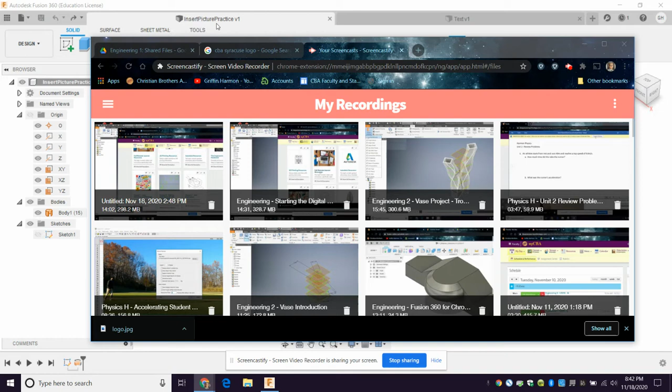All right everybody, I just want to quickly show you some stuff in Fusion 360 here. I've opened up Fusion 360 on my PC.

This water bottle one, for inserting the image, I thought I had made a work plane in here, but I guess I hadn't. So you can't just insert an image anywhere, you have to insert it into a sketch on a plane or put it on a plane.

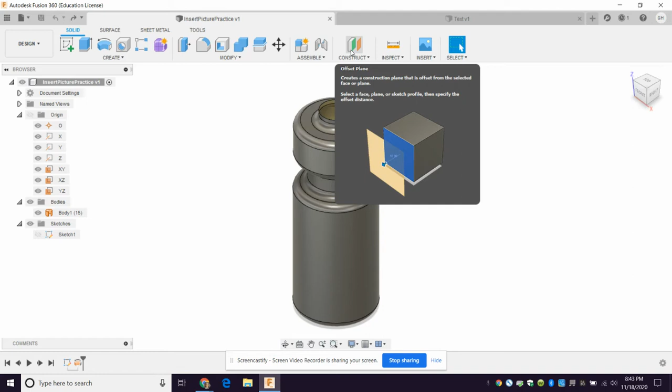So I'm going to go to Construct, click the arrow here, and do a tangent plane. I click this surface, want it tangent, then you can set your angle to whatever you want. I'm just going to make it 0 degrees.

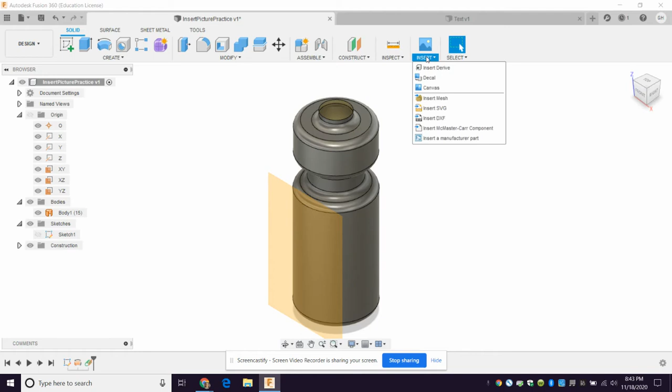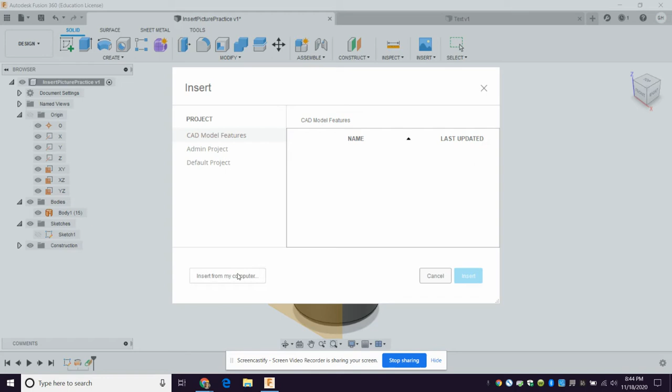Now I'm going to see if I can insert a canvas. This is interesting, it's a little bit different than Inventor here. So I'm going to do canvas, and you've got to insert from the computer. I just got a logo JPEG here.

You can click that plane and it puts it on there. I think you can rotate it here somehow... no, I don't know. So I'm going to hit OK, and then I can rotate it after the fact, I suppose. But that's how you place it in there.

So that's making sketches, you just place the image in there. If you want to decal it, which is wrap it on the bottle, I think you have to do it right from there, straight away.

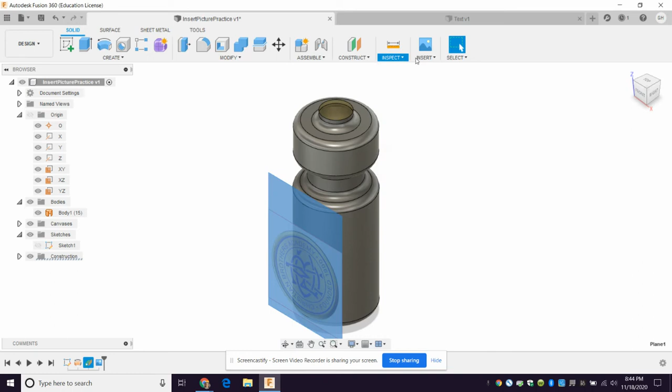So you go back to this, insert, decal, and again insert from my computer, the logo, open, and you want to put it on that face. It just kind of throws it on there randomly, and you can change the size and location. I guess you can move it that way. There's a way to change this. Oh, that's the rotation of it.

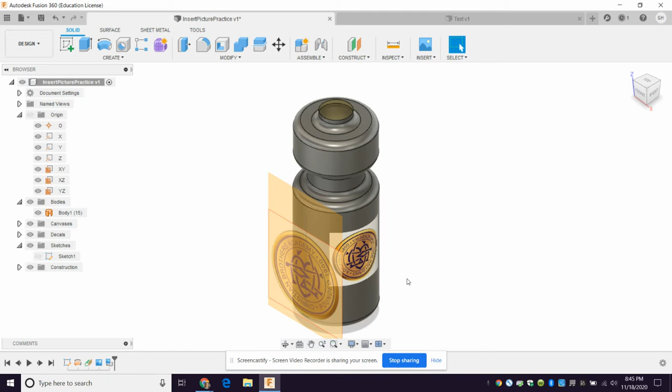So I can't seem to figure out how to get it upright, but that's okay. That's how you decal in here, and then that's it, so that puts the image on the bottle. Now why did it change size? I'm not exactly sure, but there you go. So that's how you decal it on there.

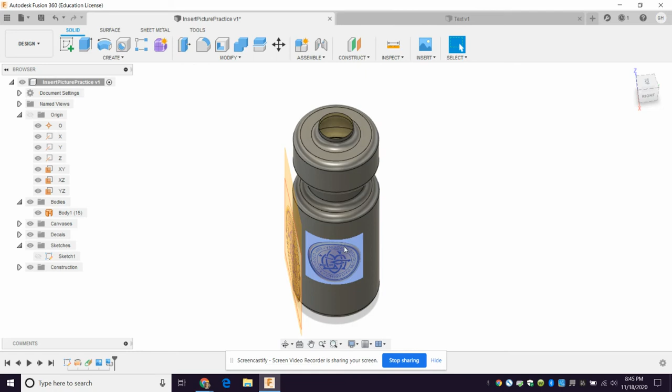So it's kind of two different things, inserting sketch and decal. It's a little bit different than it was for Inventor. Not so important, we almost never decal. It doesn't 3D print that, obviously, it just makes it look interesting.

The text one, I'll show that. The work plane was in this one, I just double checked. So you got to add that work plane, the previous one, to be able to insert the image. And then the decal, you can just do it right there.

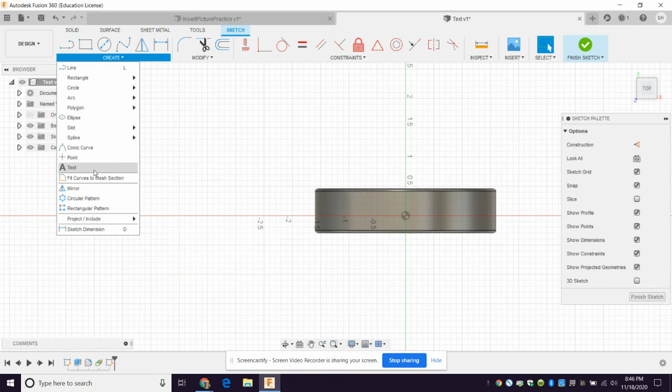Now the text one, I create a sketch on this plane. And then I can do the text, create text. I always just click somewhere. I guess it's going to make me make a text box here. Okay.

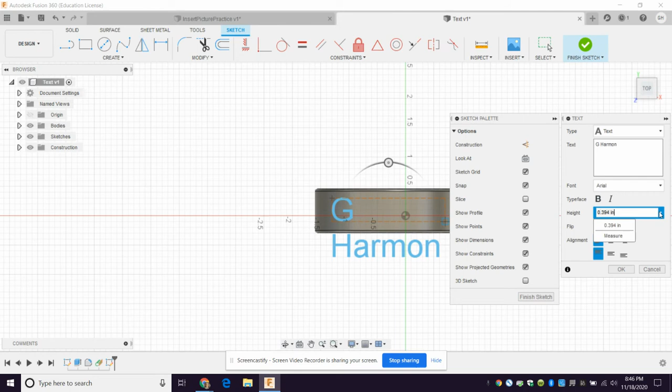All right, then I'm going to do it, put your name. All right, so mine's a little bit big. Now let's see if this does this height.

One of the things that always drives me nuts about Inventor is you have to highlight the text in the text box. And the other thing that drives me crazy is font, you don't get a preview of the font. Same thing here, you can't really get a good preview of the font. You can click it, it changes it. Anyways, hit OK, there it is.

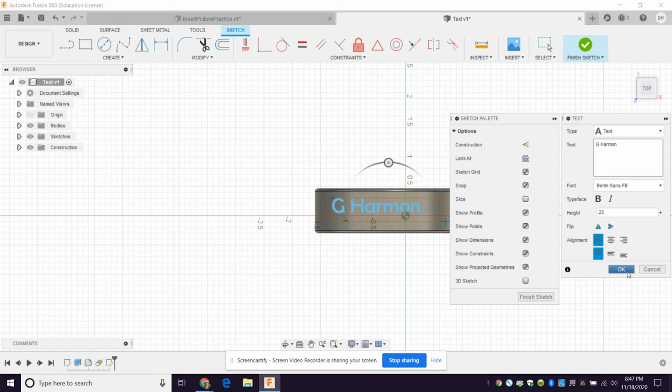You can move it around, center it better if you want. Finish sketch, so that when you get to the next project you do the same thing. And you do create, emboss.

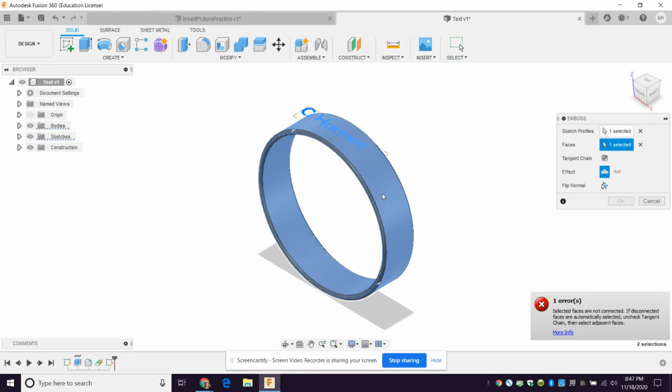Click the sketch, and then you want to select the face, this face, and that should be it. Effect, emboss. Now why is it not saying... let me do OK. Let's select, okay, that wasn't selected for some reason. Faces, select, select.

Oops, I clicked the wrong thing. Let's just cancel that, let's try it one more time. Create Emboss, select the profile, bam, G Harmon. Select the faces, we want this face. Why did it highlight all of it?

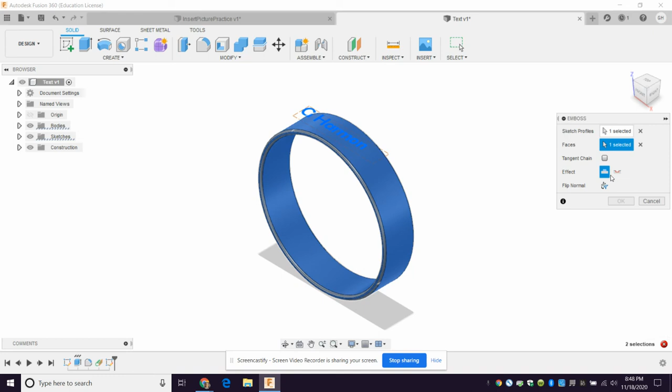Uncheck tangent chain, okay. Still giving me an error, sweet. All right, let's try one more time. If this doesn't work, then unselect tangent chain face. Why is it... anyway.

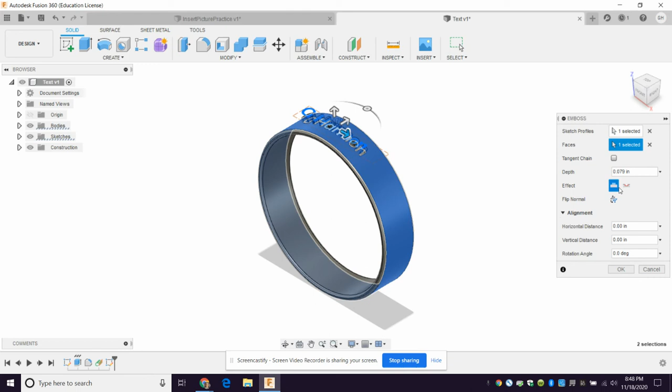Okay, seems to have gotten it now. There you go, click OK, it'll do it, it's embossed. Cool. So I had to unclick that tangent chain option there. So that's how you do those two.

All right, so insert picture practice, there's your text and your emboss. That should wrap up this project.